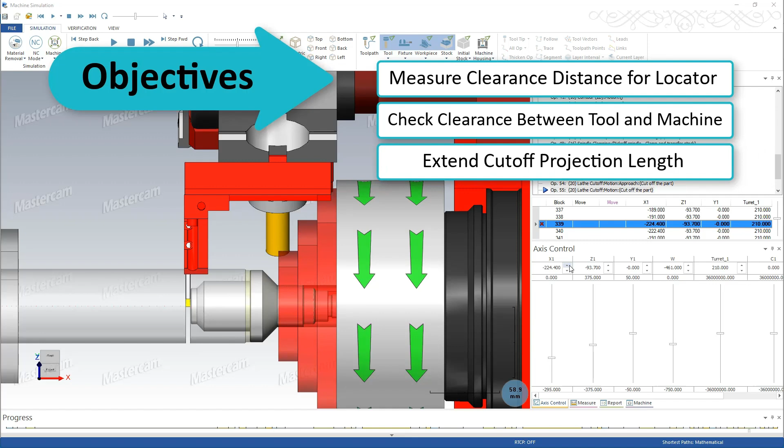We are picking up where we left off in simulation, after the cutoff locator collided with the right spindle chuck jaws. And we can see from axis control on X1 that we're at minus 224.4. So while we're here, let's use some of the tools in simulation to determine how far we need to move that cutoff blade out and if we have the clearance on the machine to do that.

So what I'm going to do is I'm going to go to X1 and I'm going to change this value here to minus 214. And you can see that brings us close to clearing. So I'm just going to move with these arrows just a little bit. And you can see 2 clicks of the arrows brought me away, and I have a little sliver here. So we're clear. I want to move it out a fair distance. So let's say minus 210. And that's a reasonable amount of clearance, I would say.

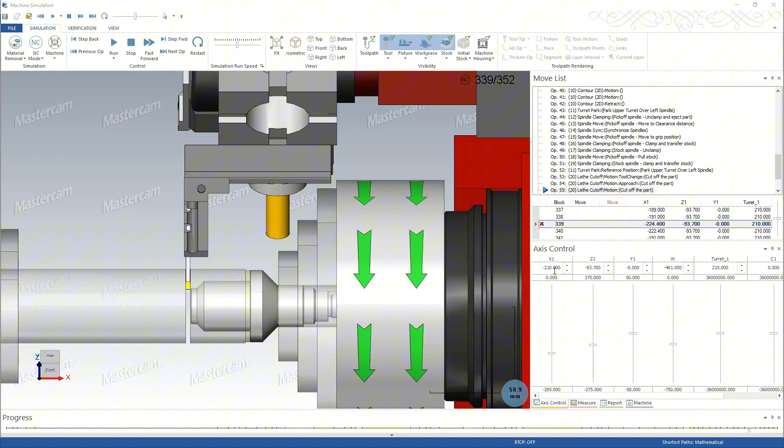So we were at minus 224.4 when we started moving the axis. We're now at minus 210. That's a difference of 14.4. Let's see if we have enough room to move the blade out an additional 14.4 millimeters from the locator. So I'm going to restart, which will bring me back to the start.

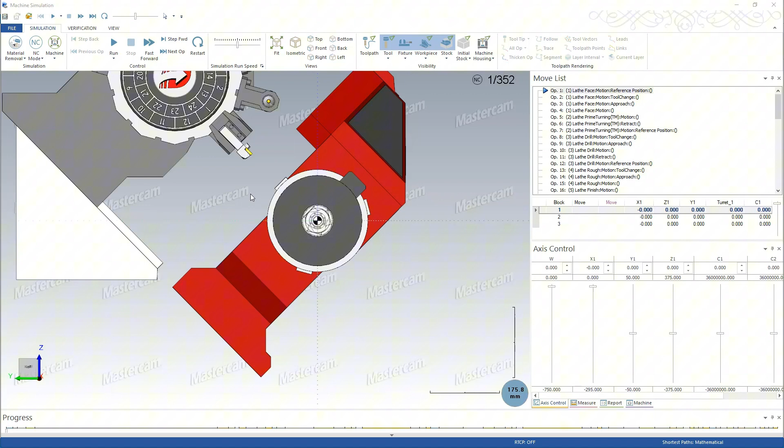Then I'll right click and I'm going to go to a left view, which should let me look at the turret nicely. We can see our cutoff blade here. I'm going to right click on one of the axes and I'm going to tell the turret to move 30 degrees. It's at 180 degrees from the cutting side. But what I want to know is, do I have enough room to move this out 14.4 millimeters?

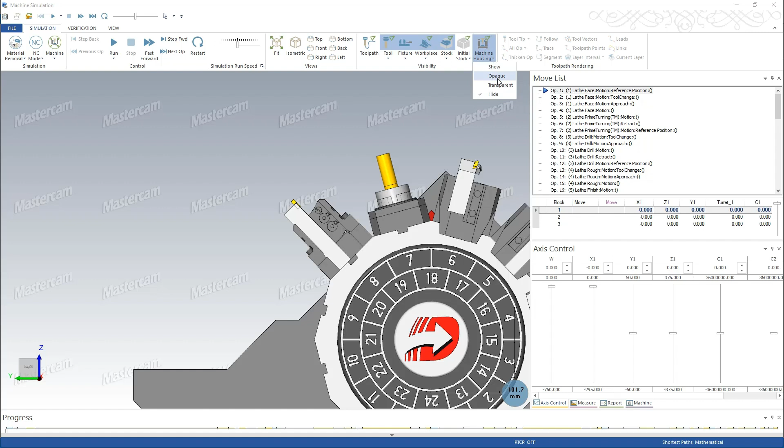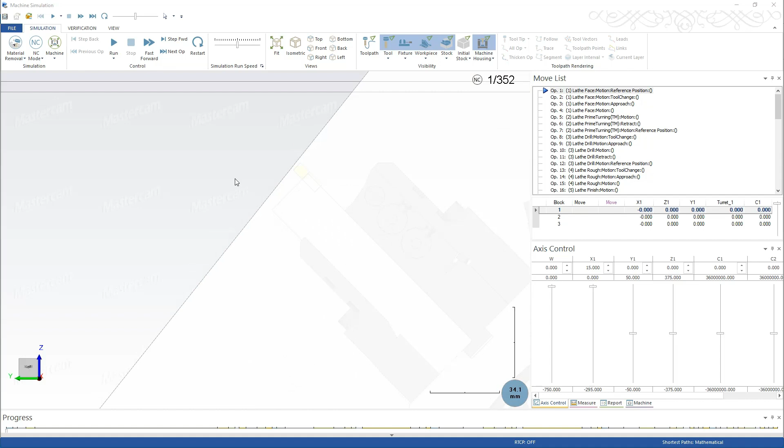So I'm going to put our machine housing to transparent. And we can see our cutoff tool back there, and we can see where the wall, the inside wall of this machine would be. I'm going to move the x-axis 15 millimeters. We only need 14.4. We're getting pretty close, but we still got some room.

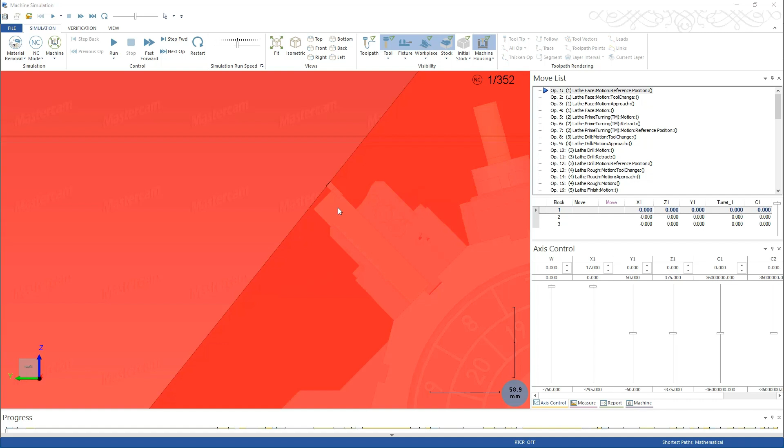Let's see what else we got here. We got 16, so we know we got at least 1.6 millimeters, 16.5. So we've got 2.1 millimeters of clearance in this case. If I go to 17, it shows collision. So Mastercam will help us determine how to set our tools on the turret. I'll put this back to 0, and I'll go back to the Mastercam part file to make the changes needed.

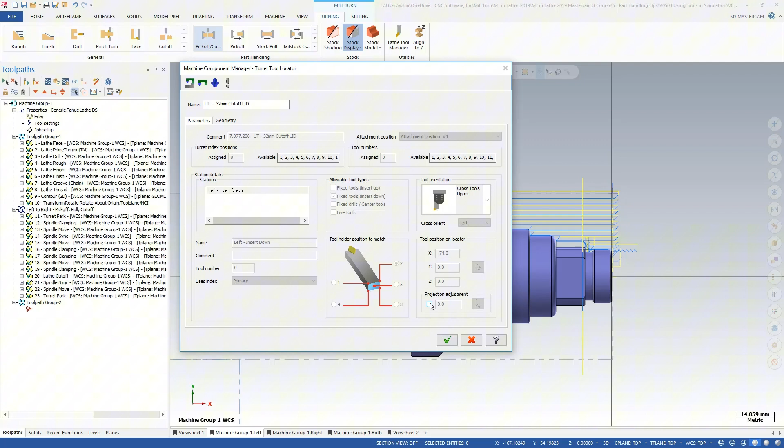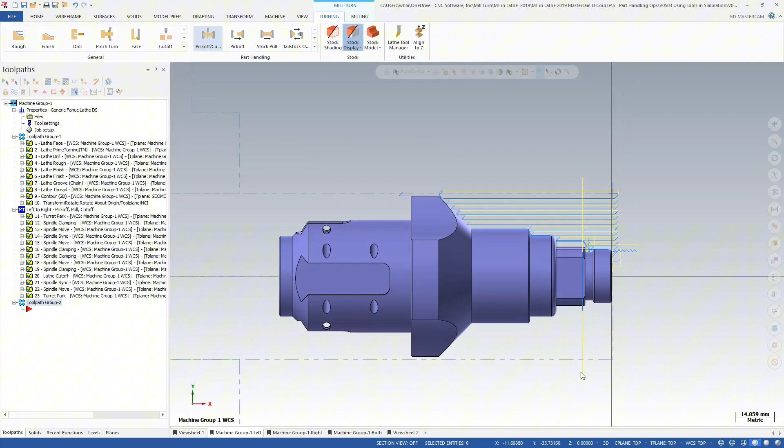I'll open up the Tool Setup Manager. I'll right click and expand all, and we can either set the projection length here on the tool, or we can go into the properties of the locator. I'll select projection adjustment, and I'll use the dynamic projection adjustment tool. I'm going to pull this out and set it to 14.4. Hit enter, enter, enter. It brings back the 14.4 millimeters. And we have extended the projection length of that cutoff blade.

I've jumped back into simulation. I'm going to run the whole process to verify it works the way we expect it to. This section of the video will be sped up to save time.

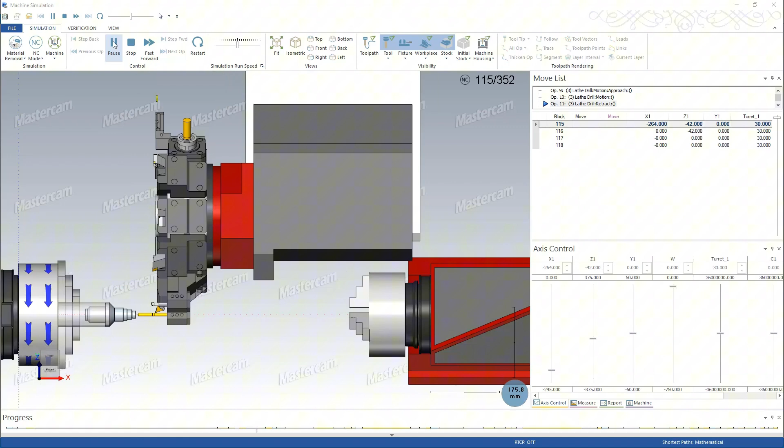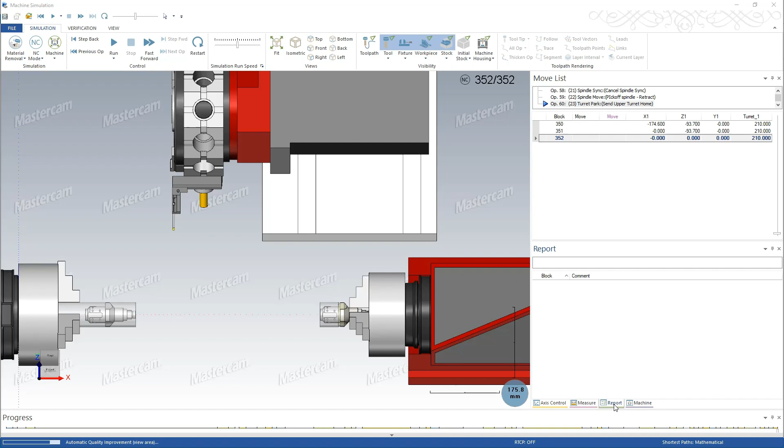Our process looks good. I'll take a quick look at the report to see if we have any error messages, which we don't. So we have a good process, and we are ready to start creating the right spindle ops.